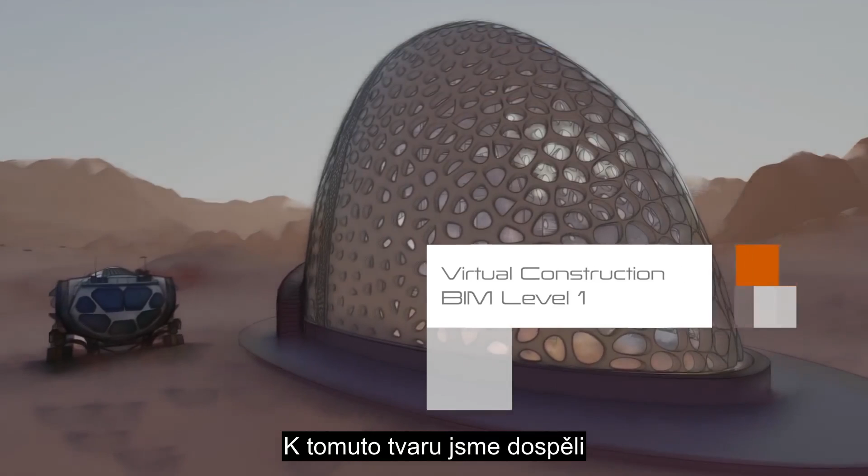We arrived at this distinct shape based on the structural, functional, and programmatic relationships. The sleekness of the design is intended to minimize the dust storms that may come along.

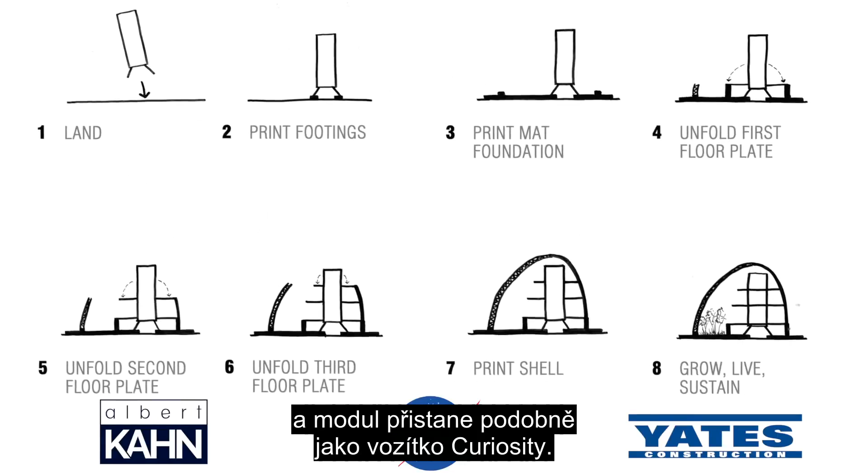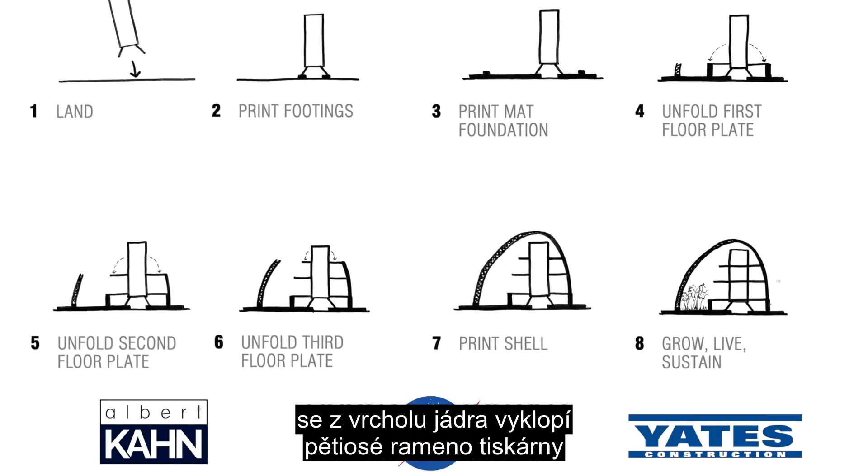Our unique solution, located near the equator of Mars, starts out with the arrival of the spacefaring module, whose exterior shell splits off as it lands similar to the Curiosity rover, leaving behind a prefabricated core. After landing upright on the Martian surface, the 5-axis print arm extends from the top of the core and prints a foundation and footing layers utilizing materials found on the Martian landscape.

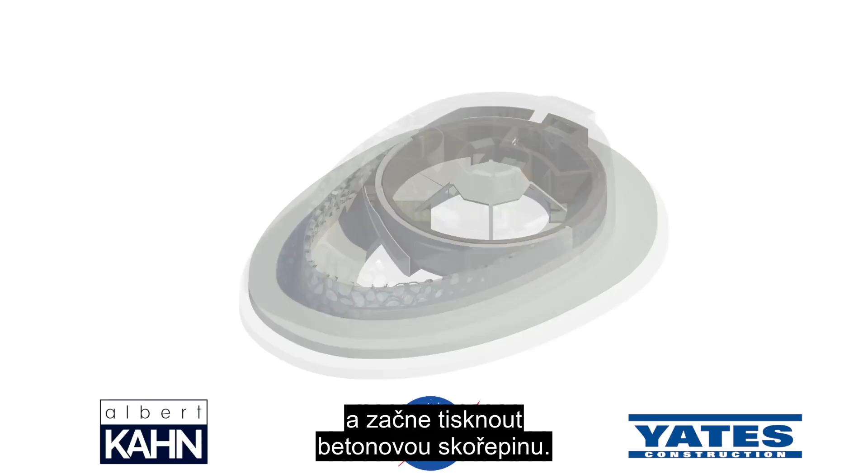Immediately following the completion of the foundation, the print arm will transition vertically to begin printing a concrete shell. Secondary print nozzles will begin printing HDPE layers on either side of the concrete, effectively sandwiching the Martian concrete in the middle. A portion of the shell construction will give way to the equipment hatch, allowing for connection to future habitats.

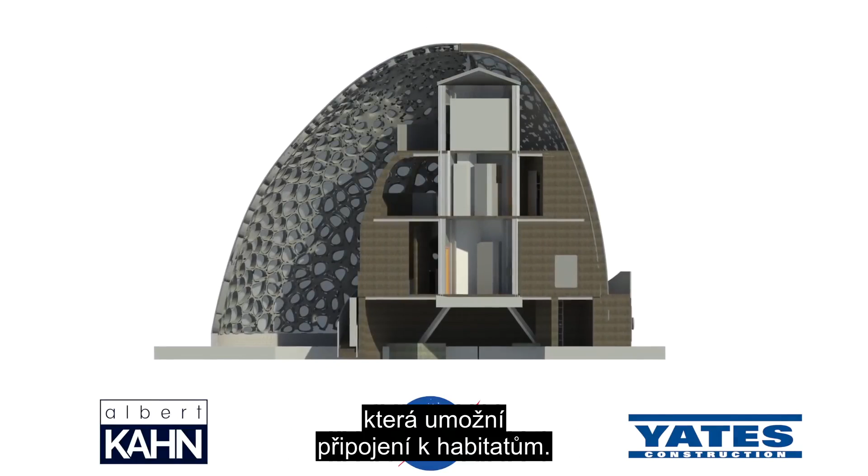When the shell construction reaches the height of the laboratory level, floor plates and supporting structural members will deploy from the pre-manufactured core, which will rest upon the newly printed shell. If desired, a slab layer can be printed on top of the plates for a cohesive floor. The shell construction will continue progressing upward.

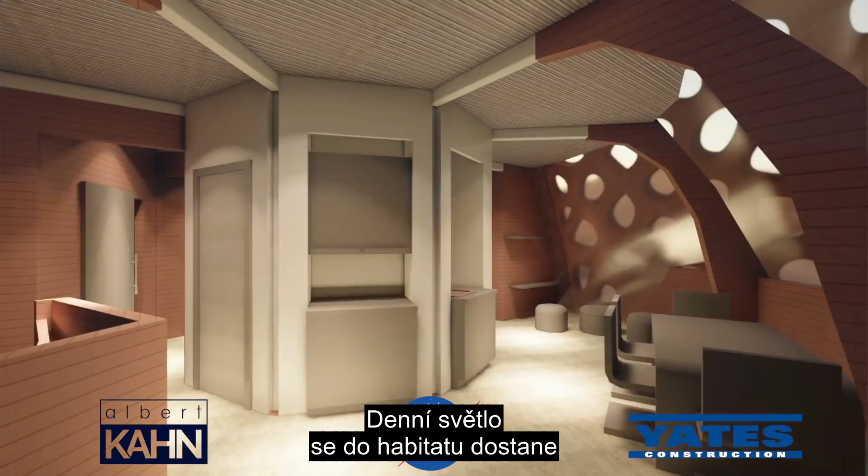Daylight will be allowed into the habitat by means of reducing or eliminating portions of the central concrete layer in the exterior shell makeup to have just the HDPE layers as the skin. The location of these daylit portions will strategically correspond to programmatic elements of the habitat and will highlight the intricate nature of 3D printing capabilities and parametric modeling.

The grade level will contain the access to the SEV and connections to future habitats. Access occurs from a floor hatch in the airlock. A garden area is located outside of the foundation wall area and accessed from the laboratory level. The design of an oblong projection in the shell allows for a great deal of daylight for gardening and food production.

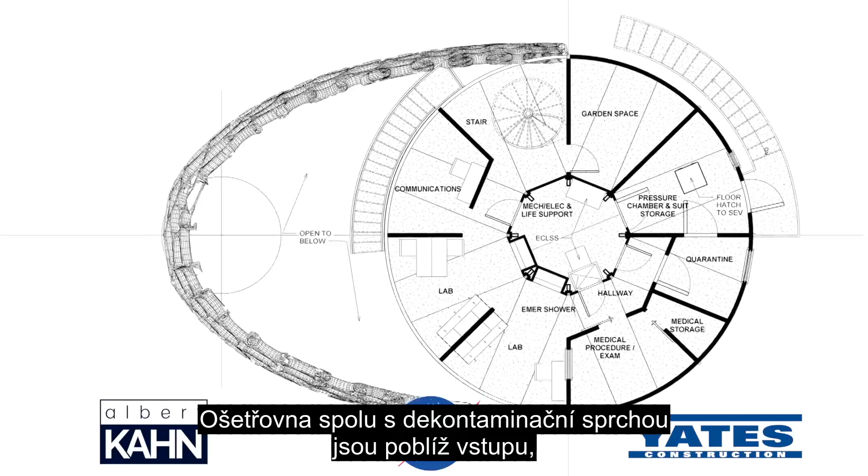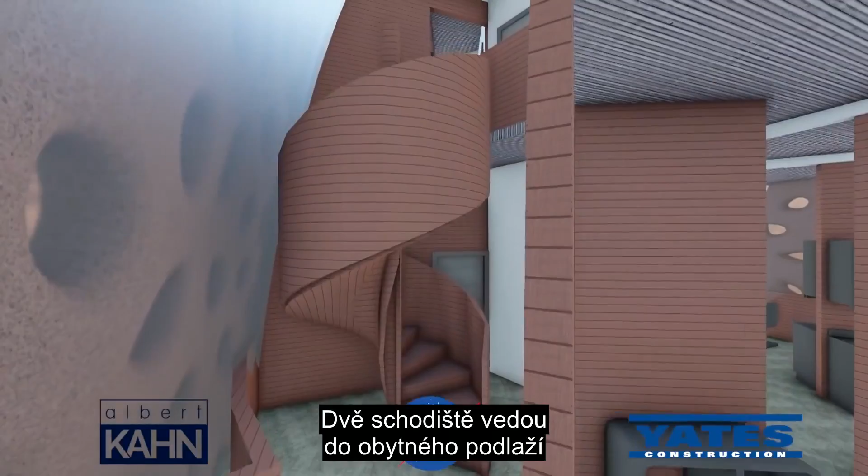The medical exam and procedure room, along with an emergency shower, are located nearby should any urgent action need to occur from outside the habitat. The lab is located adjacent to medical. Next to the lab is the communications room. We then have a stair that leads to the living level and one that leads down to the ground level.

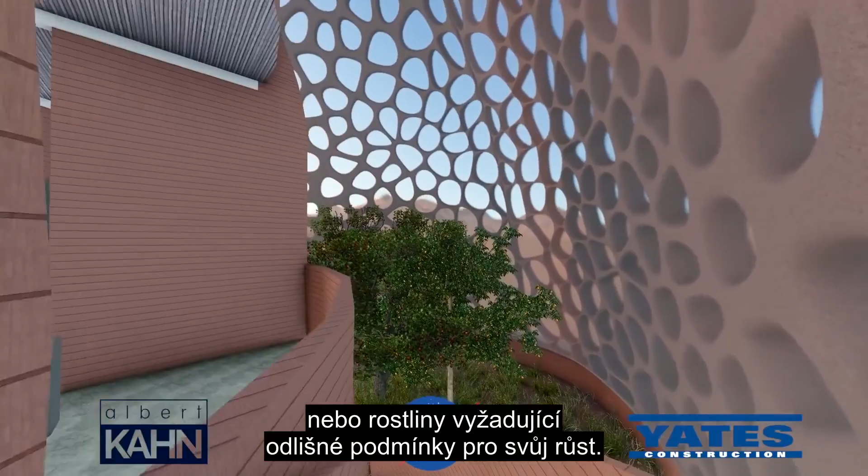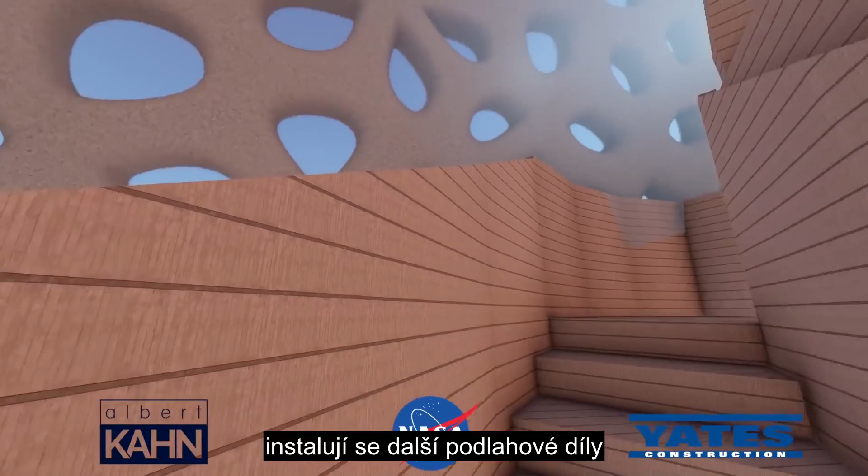Next to that is the garden room that can be used to grow plants from seedlings, as well as plants that require different environmental conditions than the ones out in the light at grade. After the lab level is complete and the shell reaches the height of the living level, another set of floor plates will deploy, and the process will repeat until the habitat reaches its terminal height.

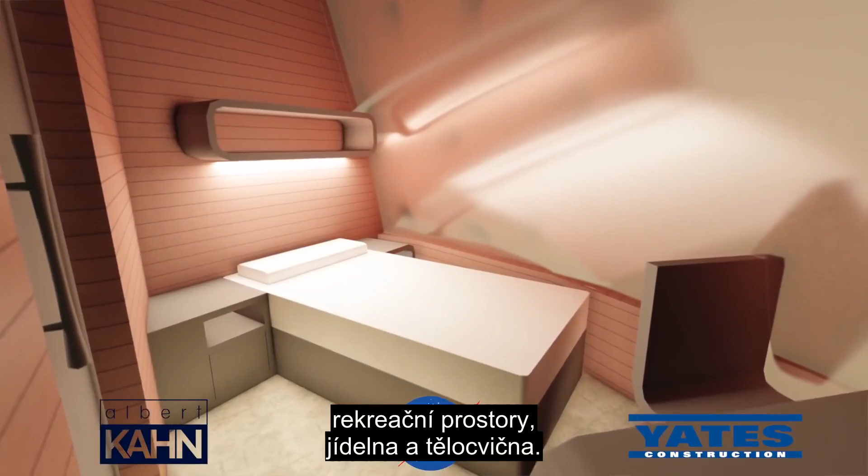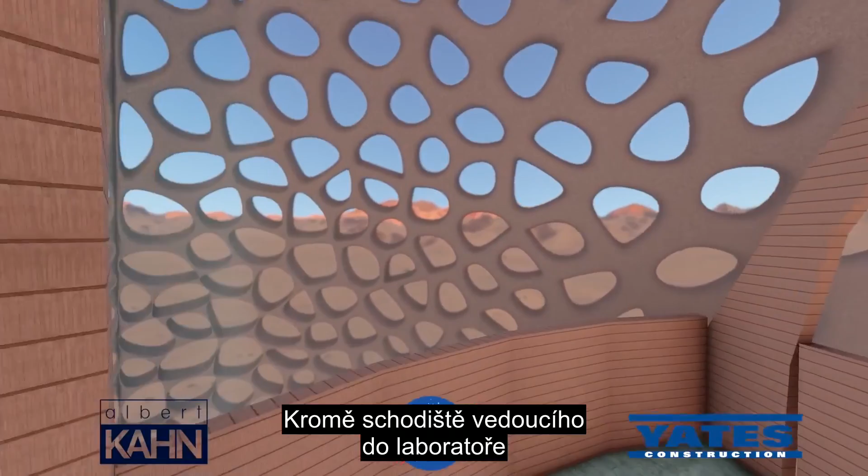On the living level, we have 4 uniform bedrooms, a recreation area, a dining wardroom, and an exercise area. The food prep and storage areas will be built into the prefabricated core. Besides the stair that goes down to the lab level, there also will be ladder access to the floor above. The upper level will house the 3D printing operations and storage.

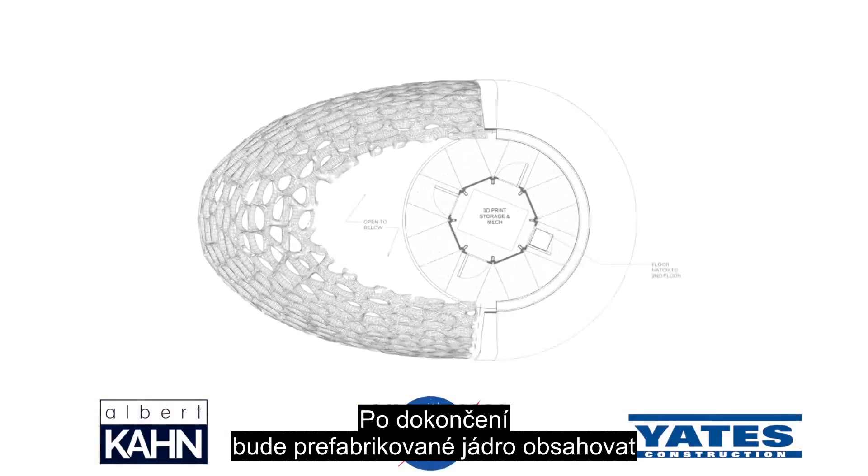When complete, the pre-manufactured core will contain all of the plumbing, ventilation, and life support equipment required for the duration of the astronaut's stay, including toilet facilities, a kitchen, and laboratory hookups as required. Communications equipment will be pre-wired into the central core and will extend through the shell near the top of the habitat.